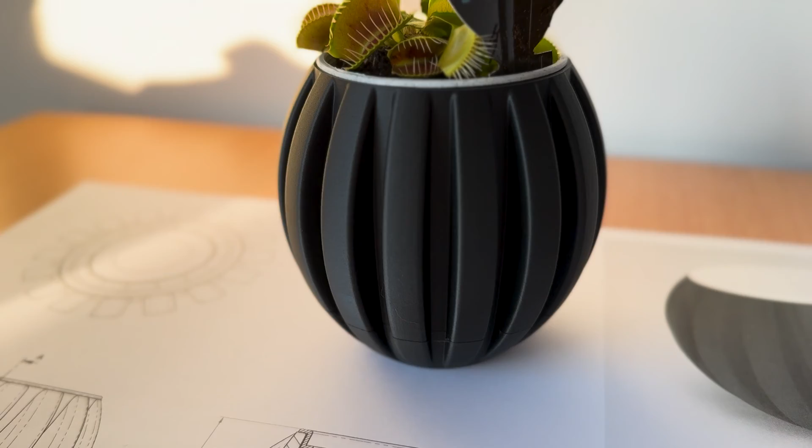So my idea was to create a better looking pot to hold it in and allow for watering. In this video, I'll take you through the process of getting from here to here. So our first step is to accurately model the existing pot so that when we create a new pot for it to go into, it'll fit. The idea here being, I'll keep it in the white plastic pot, but hide that within something much better looking.

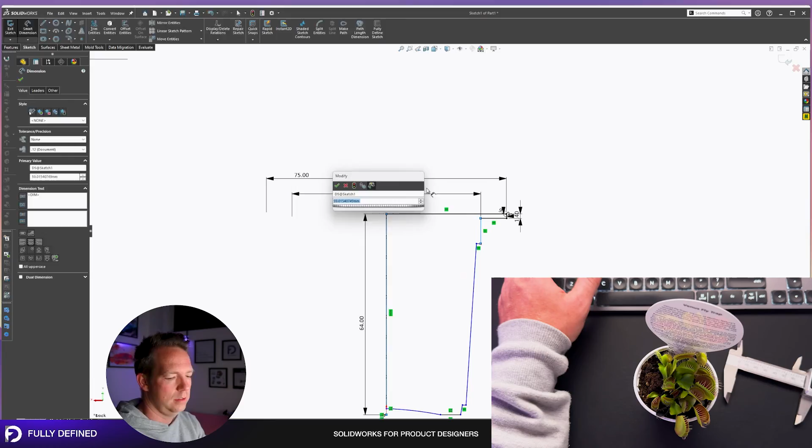Using my calipers and taking some of the key measurements of the pot and building up as I go. My aim is to do a revolve boss. So I'm just creating what would be like a section of that pot. Now, it is difficult to take some of those dimensions, such as the angled side, but if you take a diameter at the top and diameter at the bottom and the height, the angle gets worked out for you.

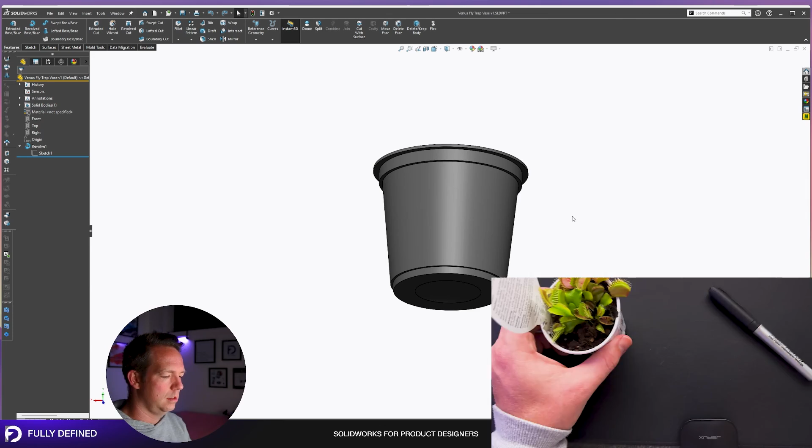Now, although this detail is going to be hidden, I was interested in retaining that faceted feature around the outside of the pot, just as a bit of a tutorial and to test myself, make sure I could replicate that detail. That was done with a cut loft and then patterned 16 times around the face.

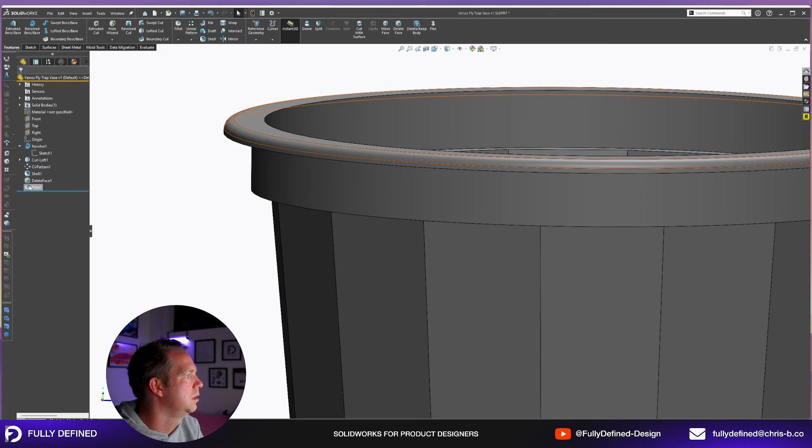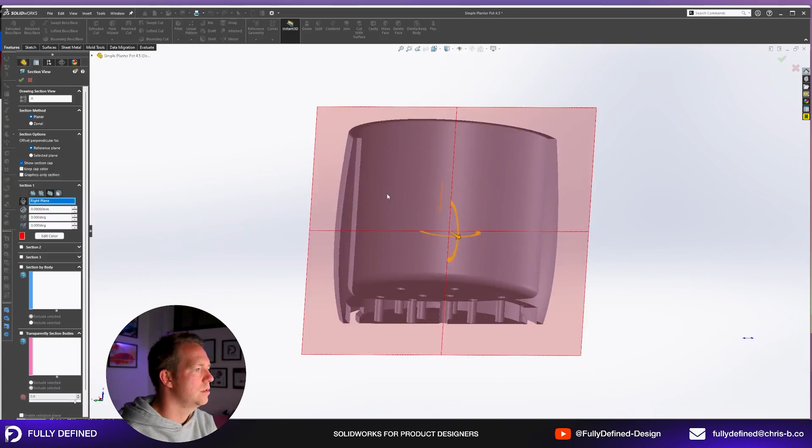Once I'd finished the pot, I already had an idea of the type of shape that I'd be using for the outside pot. And for that, I've taken inspiration from Hendrik's design. If you haven't seen his stuff, if you're into 3D printing, highly recommend it. And he does a lot of great work on little 3D prints like this for mounting planters, which have a removable twist bottom for watering. Oof, very nice indeed. So I thought I'd support Hendrik's and purchase and download some of his files.

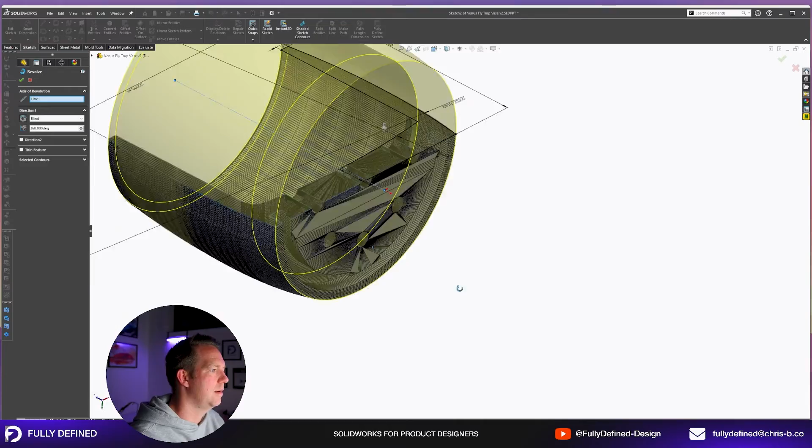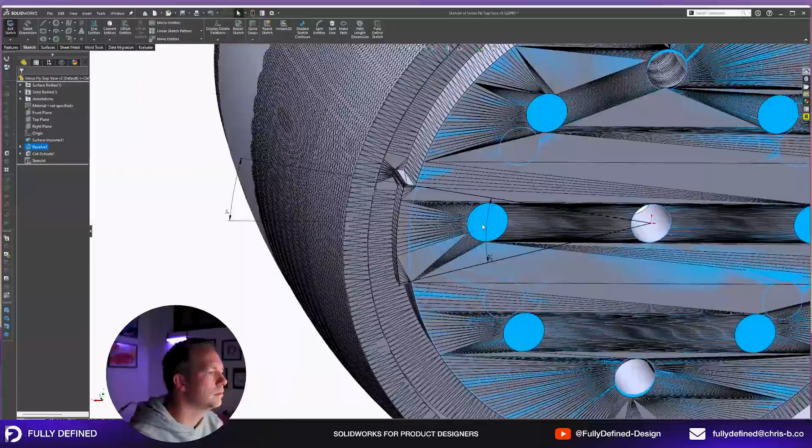Unfortunately, all the files that he has, the STLs, and a few other ones, even the step files, they wouldn't import correctly. Now that's because he's using different software for exporting. I don't blame him at all. This is one of those things that happens when you're using external files. So my solution was to get the best STL I could, which was a surface model here, and then recreate the geometry exactly as he had made it.

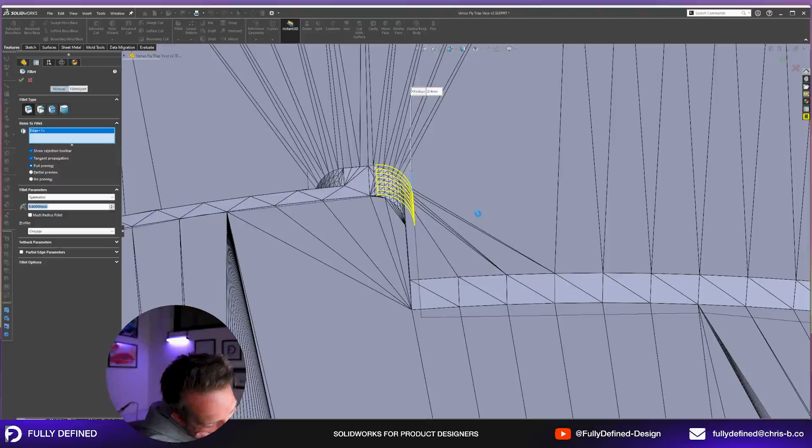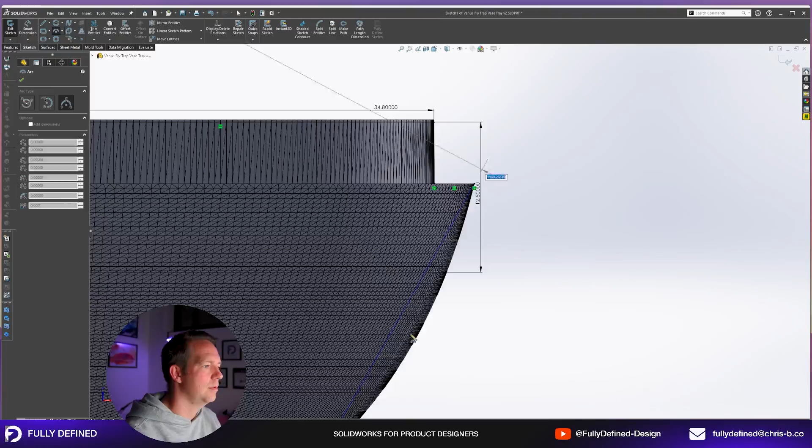So I just created the basic outside shape and the holes in the bottom, but what I was paying particular attention to was the interlocking feature that's in the bottom faces. And as you can see here, I'm making sure I'm matching some of the fillets, the thicknesses, and the chamfers so that everything would click together nicely. Now there's two parts to this model. There's the top part and then the bottom cap, which I'm opening up now.

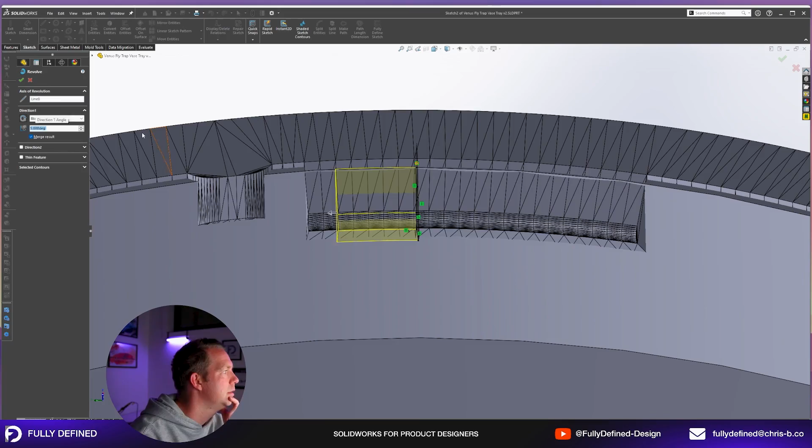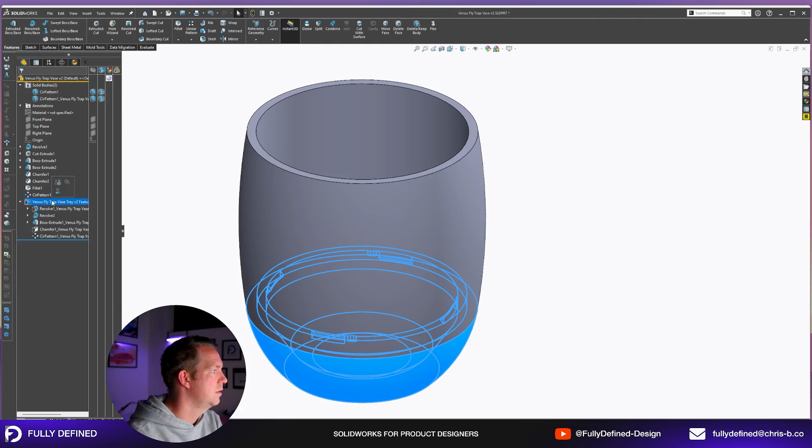Once I had created that model and created all the details I need, I went back and deleted the original imported body just to clean up my file and make it easier to work with. So recreating the detail in the bottom part, again, straightforward. I'm using the existing geometry as references, but then making sure that all of my dimensions are independent. So independent of the original geometry, just matching it by eye. And you'll see later in the video how successful that was in creating the 3D print.

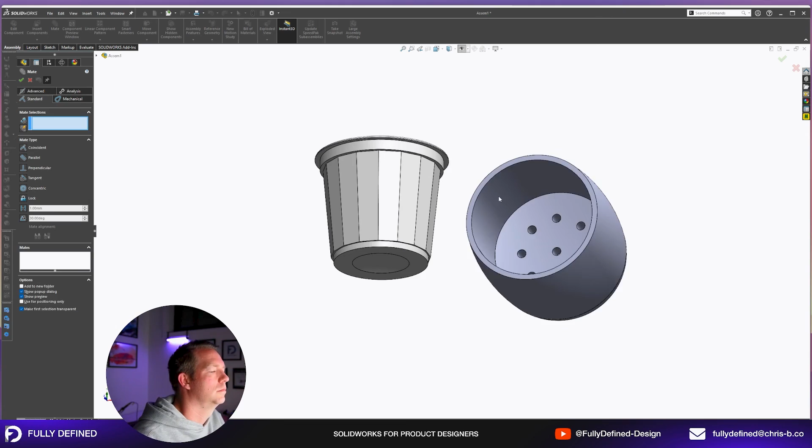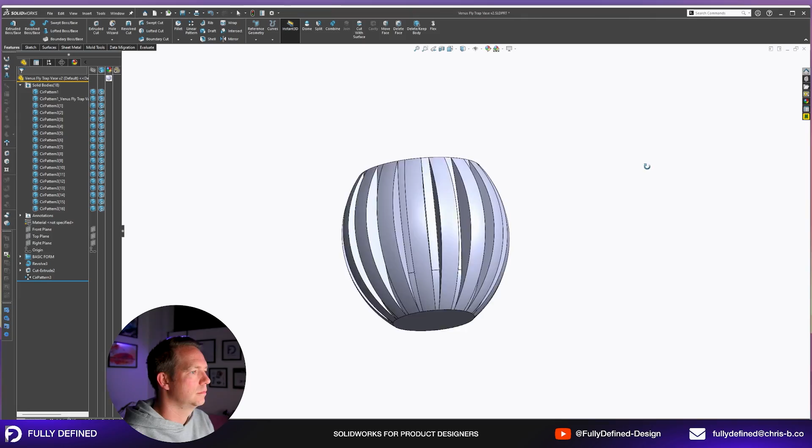So once I brought both parts together, they were separate, but I did a little trick to import one part into the other and then make the features unlinked from the original file. I was able to clean up some of those details to make sure there was some nice clearance underneath. Once I'd done that, I created an assembly to import the original pot, make sure that fit, which it did. Thankfully, it was a very close fit already, so I didn't have to do too many changes. And then I did some simple customizations to the outside to get a nice looking pattern. Again, inspired by Hendrik's design.

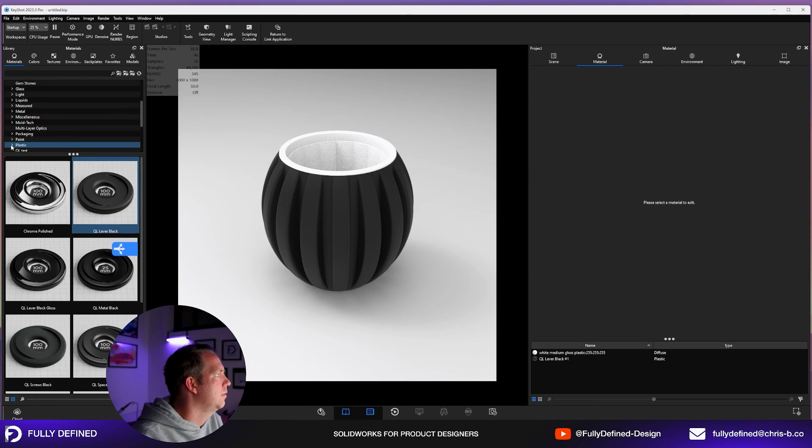The last steps here were to split that pattern and merge that to both the top and bottom parts of the model. Now, I did want to get my son's approval for this design before hitting 3D print, and I did that with a simple drawing and a KeyShot render just to show him what it would look like. So the next day, after he checked that off, I sliced it on the Bambu Lab and hit print.

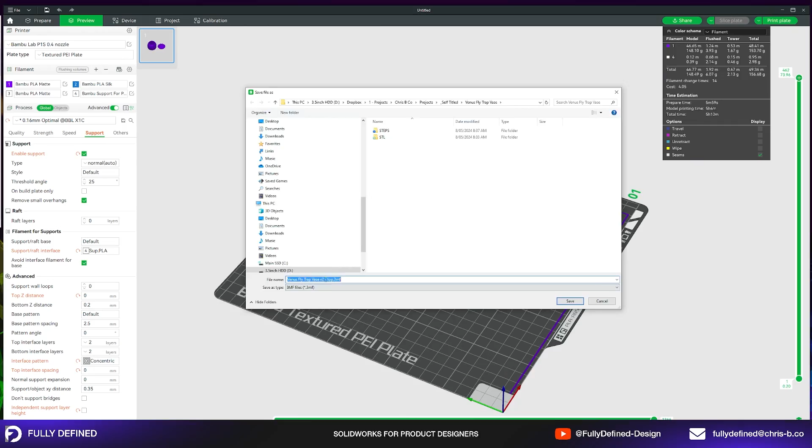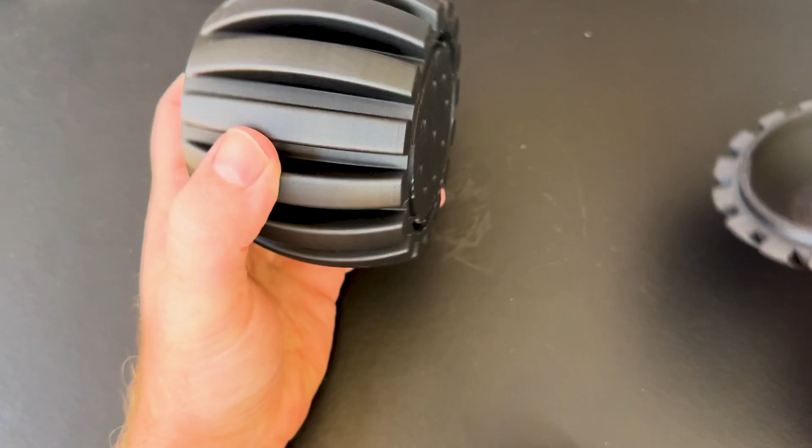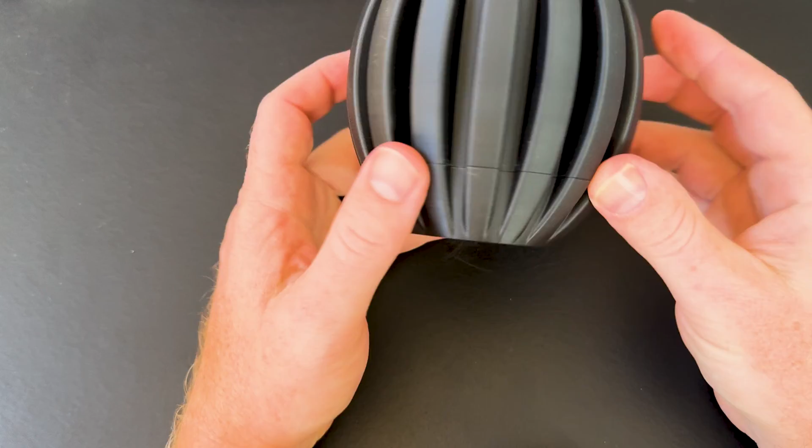That printed overnight, but unfortunately, there were some issues with the time lapse of the 3D print. So I couldn't show that, but this is the first 3D print that came out. There was only a little bit of cleaning to do on the bottom, but that first snap together, man, I was really impressed by the detail and geometry that Hendrik's design had put into his vases. So kudos to Hendrik's. And the fit with the pot, very nice.

So I hope you liked this video, showing you the process, going from idea, modeling a part, splitting, referencing another, and then 3D printing.